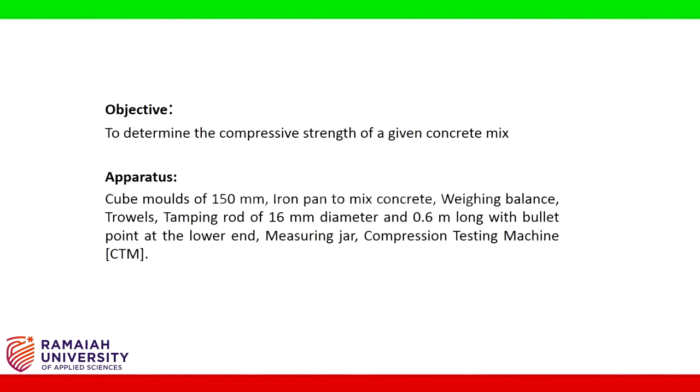Hello friends, with this experiment we are determining the compressive strength of a given concrete mix. Apparatus: cube molds of 150 mm, iron pan to mix concrete, weighing balance, trowels, tamping rod of 16 mm diameter and 0.6 meter long with bullet point at the lower end, measuring jar, compression testing machine, that is CTM.

Compression test is the most common test conducted on hardened concrete, partly because it is an easy test to perform and partly because most of the desirable characteristic properties of concrete are related to its compressive strength. One of the most important properties of concrete is its strength in compression.

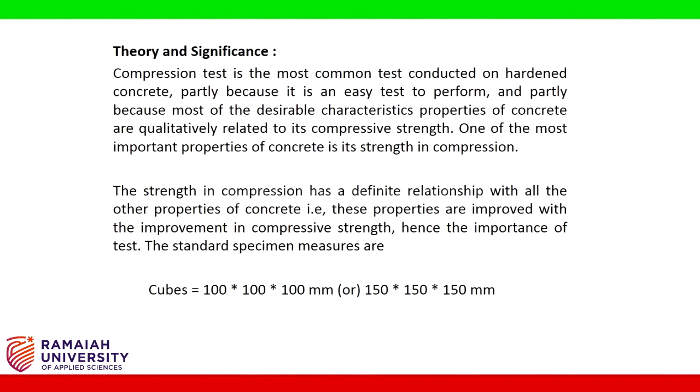The strength in compression has a definite relationship with all the other properties of concrete, that is, these properties are improved with the improvement in compressive strength. Hence the importance of the test. The standard specimens are cubes 100 x 100 x 100 mm or 150 x 150 x 150 mm.

Procedure: sampling of materials. Samples of aggregates for each batch of concrete shall be of the desired grading and shall be in an air-dried condition. The cement samples on arrival at the laboratory shall be thoroughly mixed dry either by hand or in a suitable mixer in such a manner as to ensure the greatest possible blending and uniformity in the material.

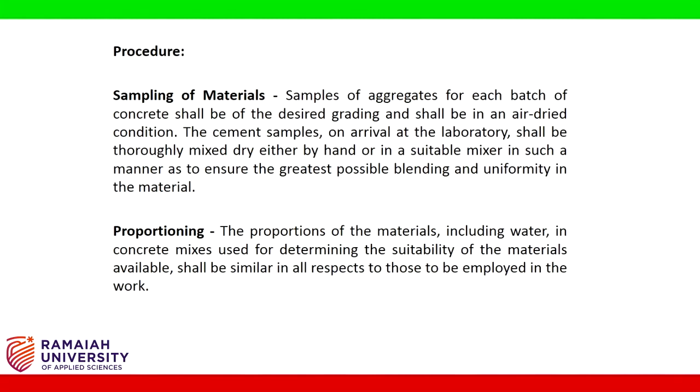Proportioning. The proportions of the material, including water, in concrete mixes used for determining the suitability of the materials available shall be similar in all respects to those to be employed in the work. Weighing. The quantities of cement, each size of aggregate, and water for each batch shall be determined by weight to an accuracy of 0.1% of the total weight of the batch.

Mixing concrete. The concrete shall be mixed by hand or preferably in a laboratory batch mixer in such a manner as to avoid loss of water or other materials. Each batch of concrete shall be of such a size as to leave about 10% excess after molding the desired number of test specimens.

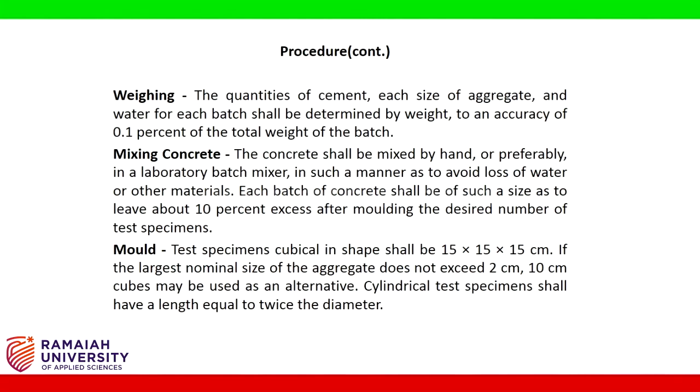Mold. Test specimens cubical in shape shall be 15 x 15 x 15 cm. If the largest nominal size of the aggregate does not exceed 2 cm, 10 cm cubes may be used as an alternative. Cylindrical test specimens shall have a length equal to twice the diameter.

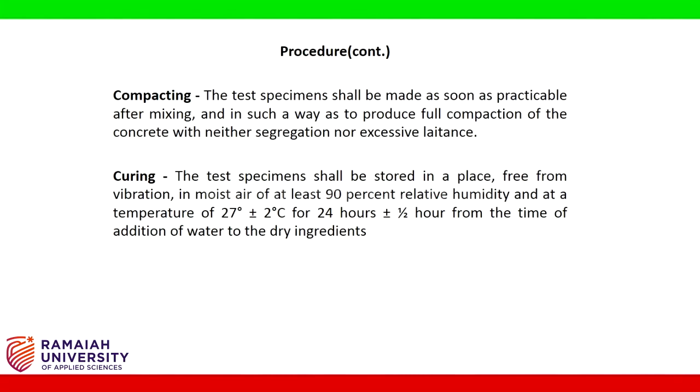Compacting. The test specimens shall be made as soon as practicable after mixing and in such a way as to produce full compaction of the concrete with neither segregation nor excessive laitance. Curing. The test specimens shall be stored in a place free from vibration in moist air of at least 90% relative humidity and at a temperature of 27 plus or minus 2 degrees Celsius for 24 hours plus or minus half an hour from the time of addition of water to the dry ingredients.

Placing the specimen in the testing machine. The bearing surfaces of the testing machine shall be wiped clean and any loose sand or other material removed from the surfaces of the specimen which are to be in contact with the compression platens. In the case of cubes, the specimen shall be placed in the machine in such a manner that the load shall be applied to opposite sides of the cubes as cast, that is, not to the top and bottom.

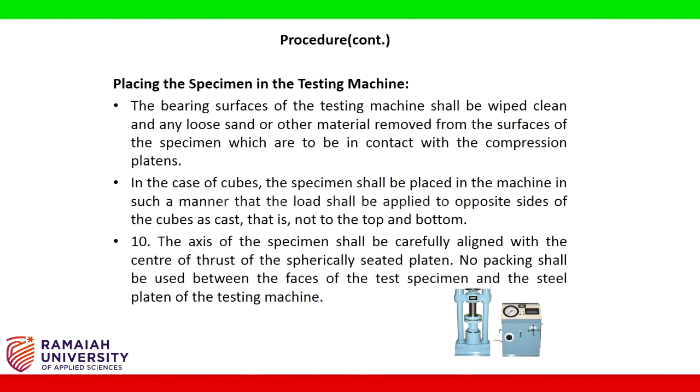The axis of the specimen shall be carefully aligned with the center of thrust of the spherically seated platen. No packing shall be used between the faces of the test specimen and the steel platen of the testing machine. The load shall be applied without shock and increased continuously at a rate of approximately 140 kg per square centimeter per minute until the resistance of the specimen to the increasing load breaks down and no greater load can be sustained.

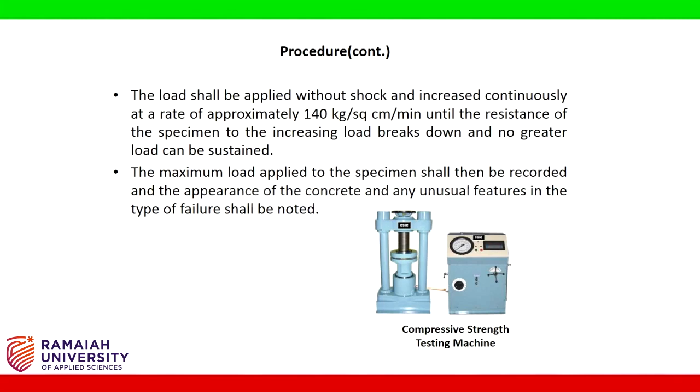The maximum load applied to the specimen shall then be recorded, and the appearance of the concrete and any unusual features in the type of failure shall be noted. Data collection and tabulation is as shown in the table.

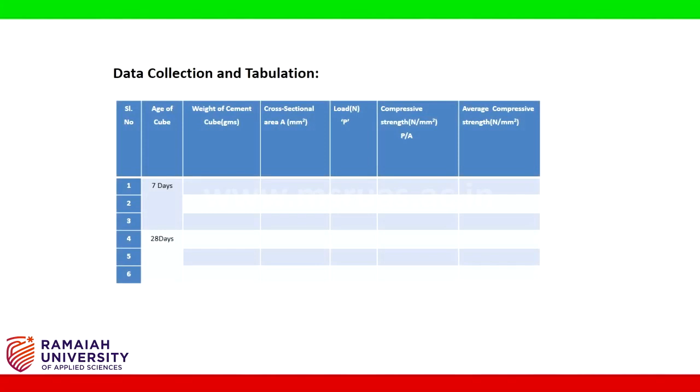Hi students, today we will start discussing the tests on hardened concrete. There are three important tests that we are going to do on hardened concrete. The first is the compressive strength of the concrete, the second one is the flexural strength of the concrete, and the third one is the split tensile strength of the concrete. So we are discussing now the compressive strength of concrete cubes. So the apparatus required for compressive strength is the CTM, that is compression testing machine.

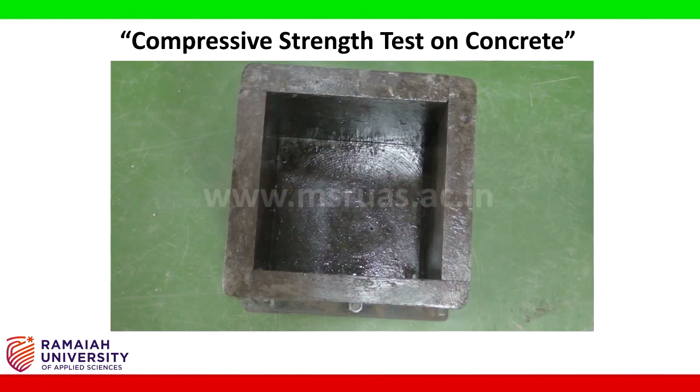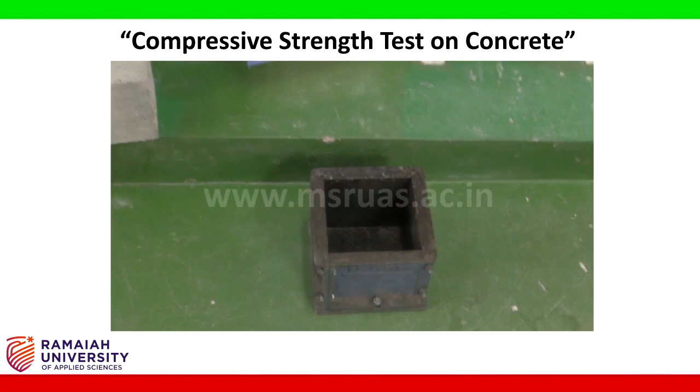This is a concrete cube mold having the dimension of 150 mm width, 150 mm length and 150 mm depth. Along with that, we require all the materials which are required for making a concrete, that is the fine aggregate, cement, coarse aggregate and the water. So let us go through how this is done.

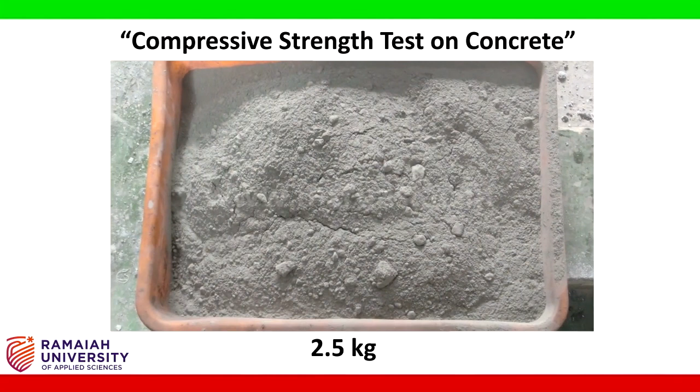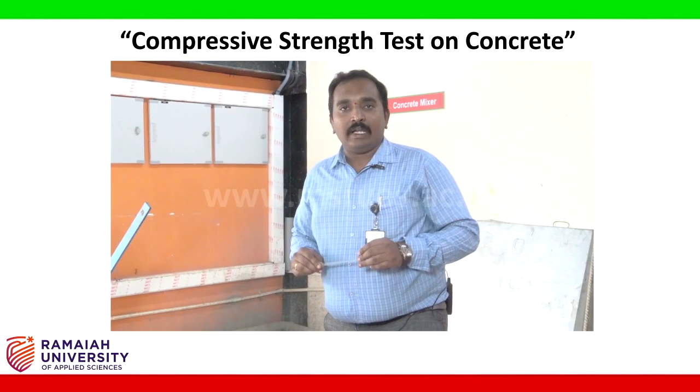The second step is preparation of mix. As of now, we've taken 2.5 kg of cement, 5 kg of fine aggregate and 7.5 kg of coarse aggregate, which comes to ratio 1:2:3. We generally do it for M20 grade concrete. For the first trial, I am considering the water cement ratio as 0.4.

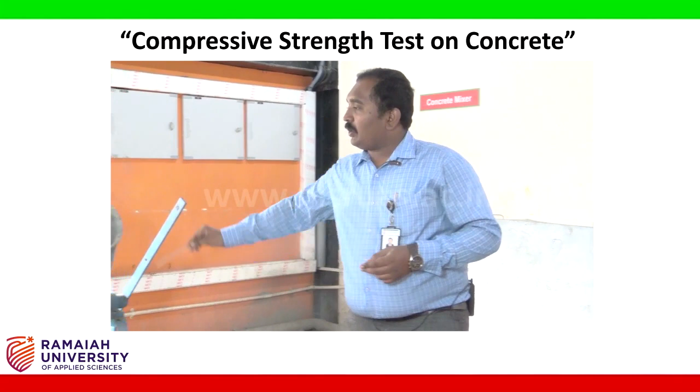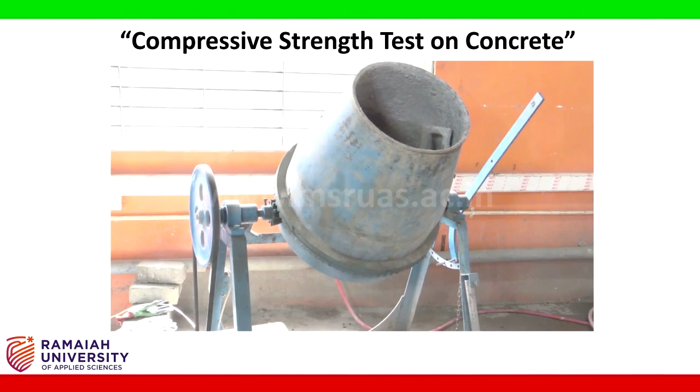We start mixing the concrete. First, we make sure that the concrete mixer, on the inner side, is smeared with the oil. So first we add the coarse aggregate to the concrete mixer. After coarse aggregate, the fine aggregate will be added.

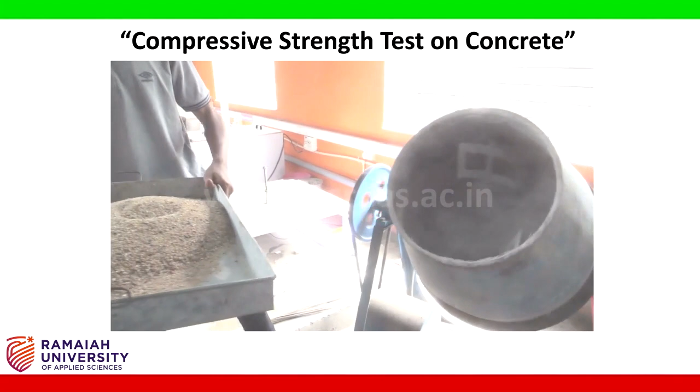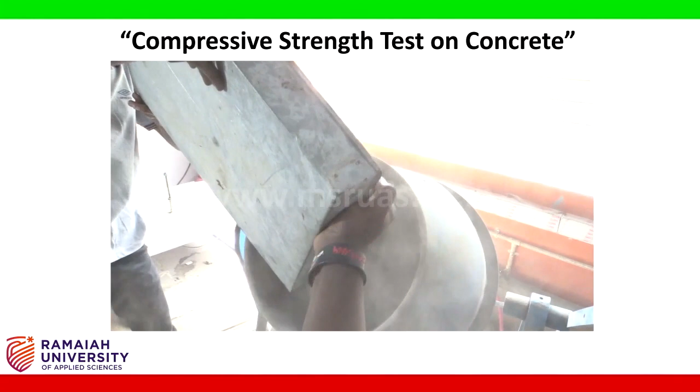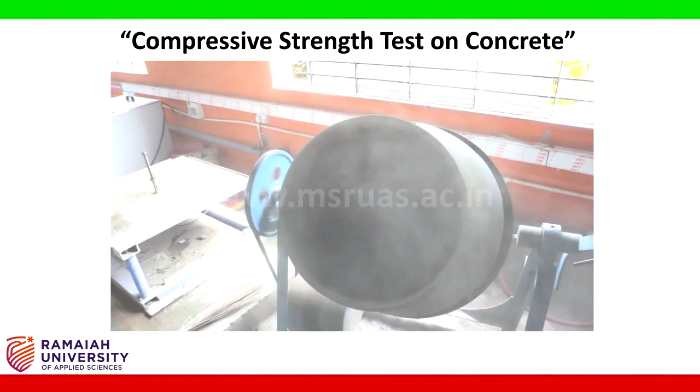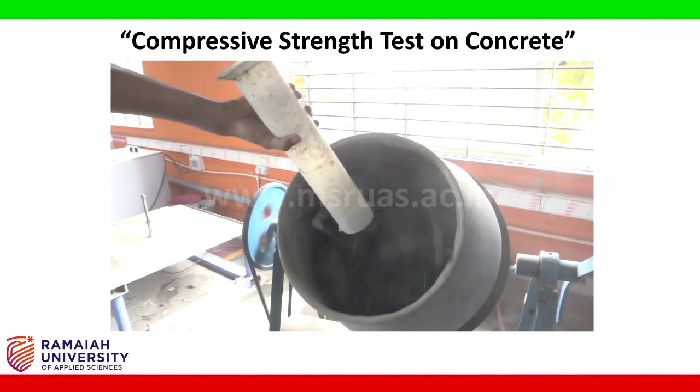After this, the cement will be added along with the water which is prescribed for this particular mix. Add the water. We are pouring the entire mix of concrete onto the tray.

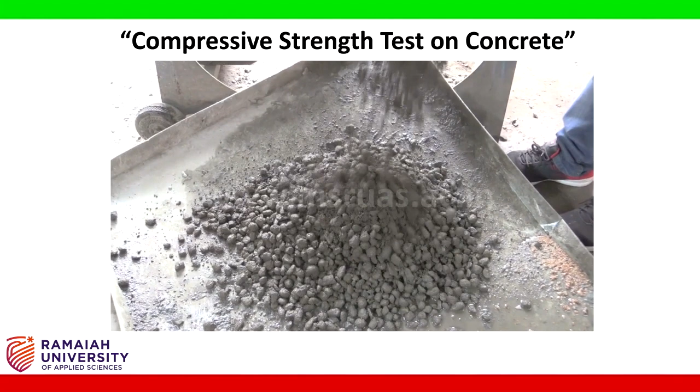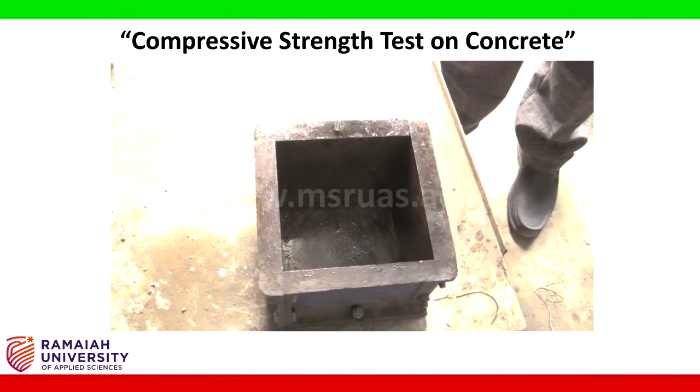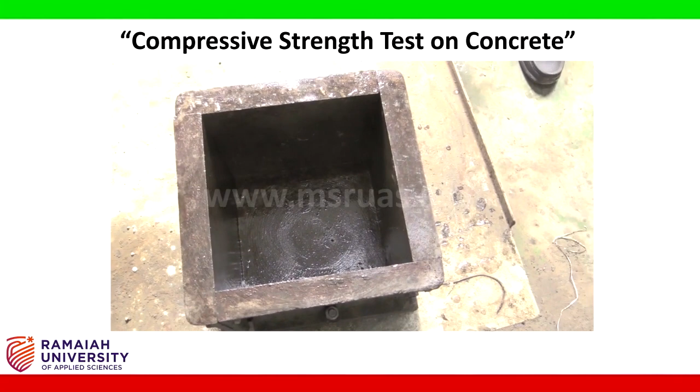After mixing the concrete, we are going to make sure that the oil is smeared inside the mold, and we are going to fill 1/3 layer of this mold with the prepared mix. After placing 1/3 mix, we should compact this 1/3 layer with 25 tampings, or what I am doing here is I am using the table vibrator for compacting the mix.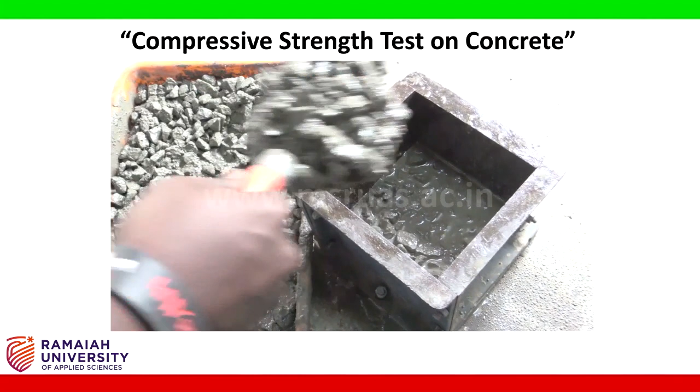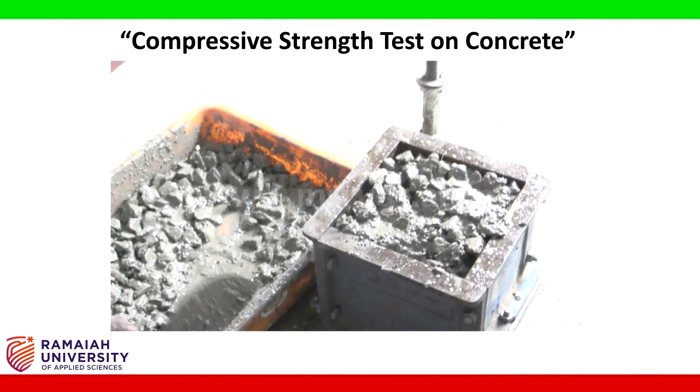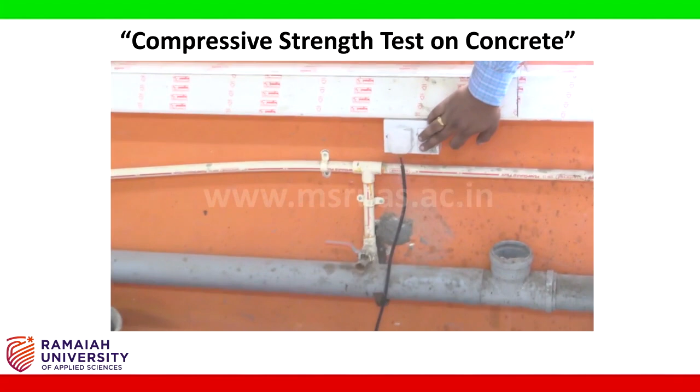The second, third layer will be added, and the final layer will be added. Like this, the cube is prepared.

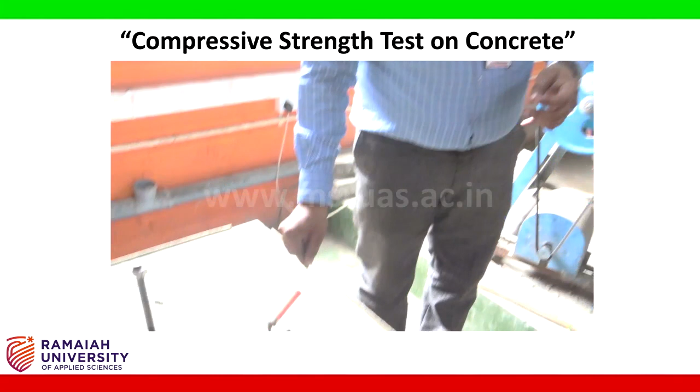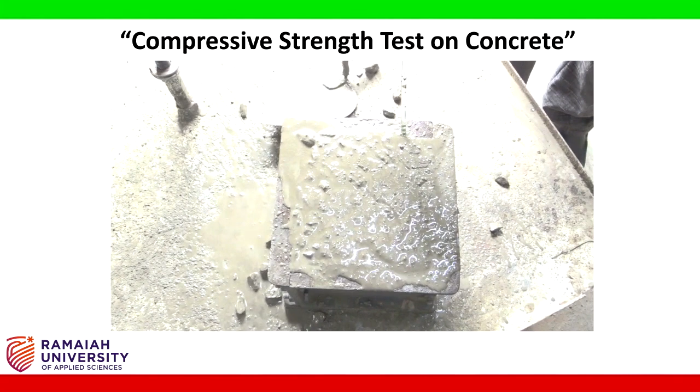So here we are doing only one sample. If I go for the IS requirements, minimum 3 samples have to be cast for one particular testing. Right now I am doing only one sample. We are going to allow this mold as it is for 24 hours. We'll air cool it. Then we are going to demold the shutter. After demolding, we are going to keep it in curing for 28 days.

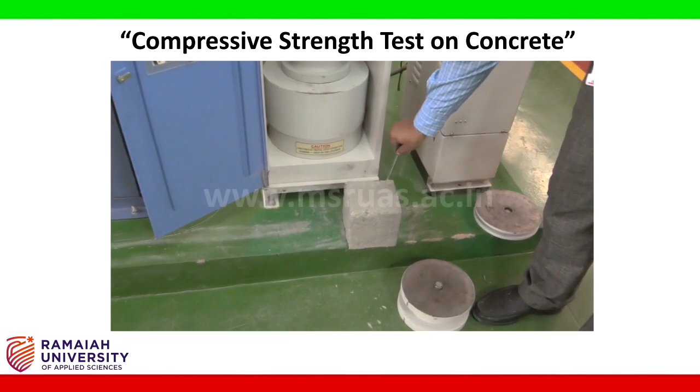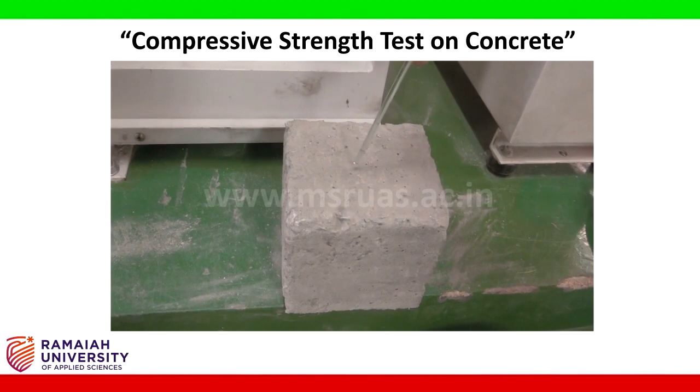After curing it for 28 days, we are going to get a cube. The dimensions of the cube are measured. So L, B gives you the cross-sectional area of the cube. Suppose this is my casting surface. I need to place and apply the load on the other side, not to the casting surface. I am going to subject this particular cube to compression.

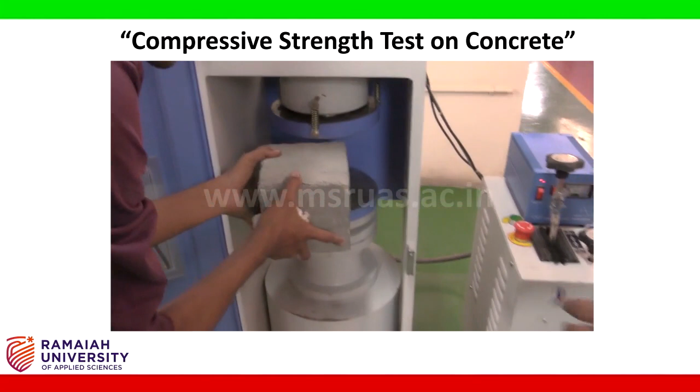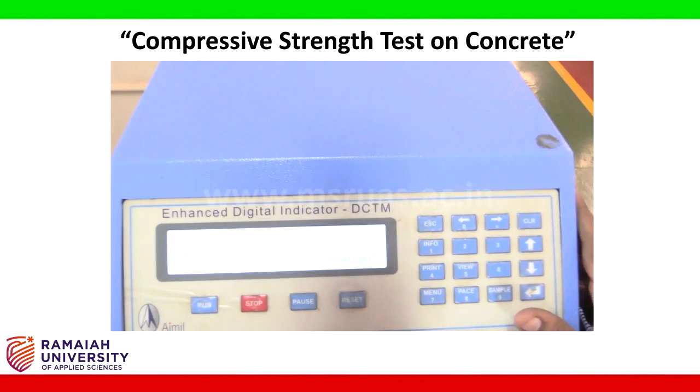After this, I am supposed to operate the compression testing machine. I am going to bring it to the compression mode. Select operating mode. It asks for mode 1 is compression, mode 2 is flexure, and mode 3 is prism setting. I am going to give compression. I put enter. It asks unit is SI. Yes, I want it in Newton per millimeter square. It tells you the model and the maximum capacity of the compression testing machine, 2000 kilonewton.

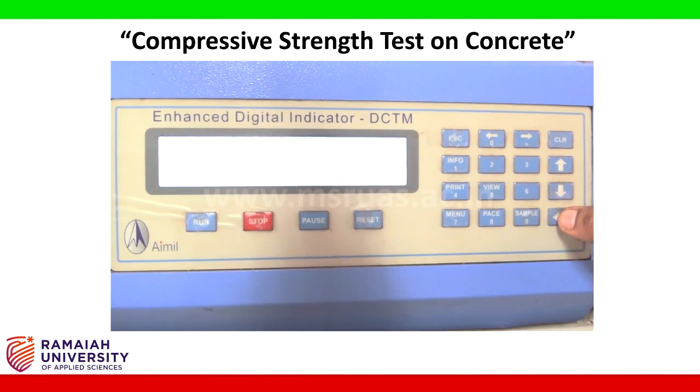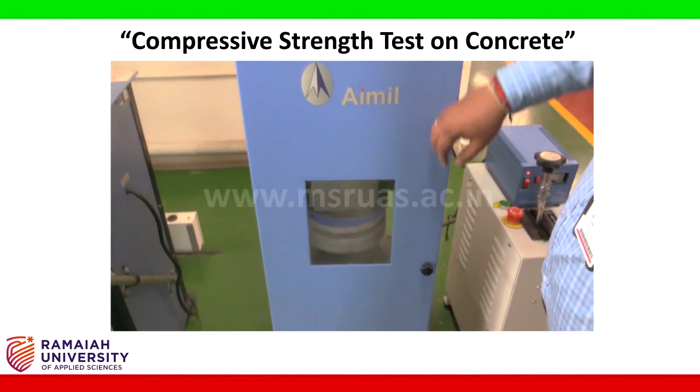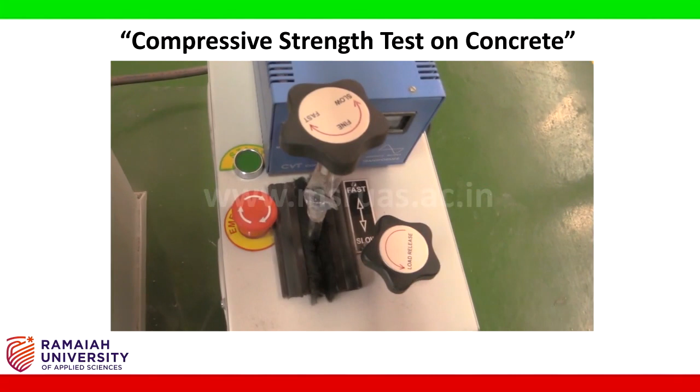After this, we are going to close the shutter, because there is a chance that under compression the cube particles may hit the tester. After doing this, we are going to tighten the load release and keep it in the center. We remove the emergency. It will be initially on. We are going to remove it. We are going to start the pump and run the testing.

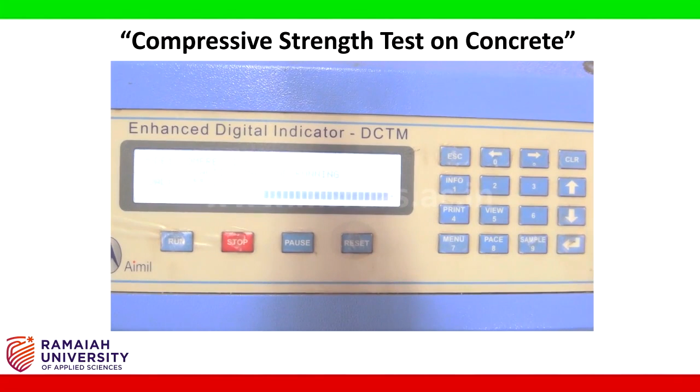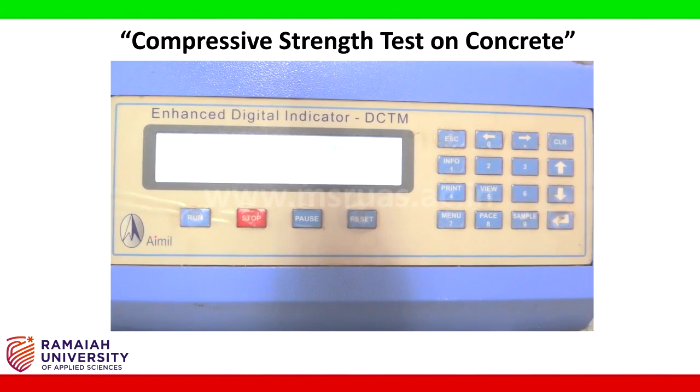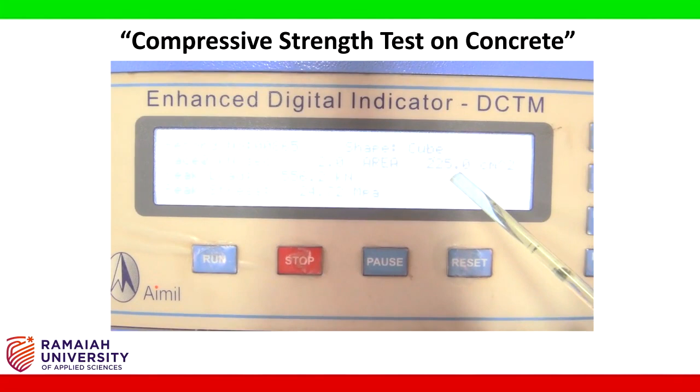We are applying the load. We are going to take up the maximum load of failure. How are we going to observe? If you observe, there is an increase in load and decrease in load. Already you observed it went to 500, so it gives an indication that the sample is broken, and it gives the peak load, that is 556.2 kilonewton. I already fed the cube dimension, that is 15 cross 15, that is 225 cm square. We have a provision that automatically gives the compressive strength, that is 24.72 MPa.

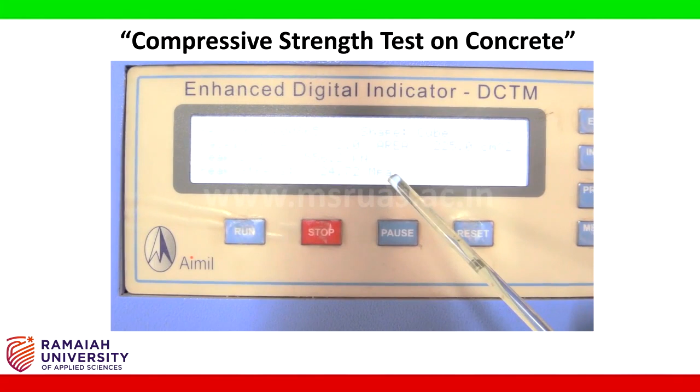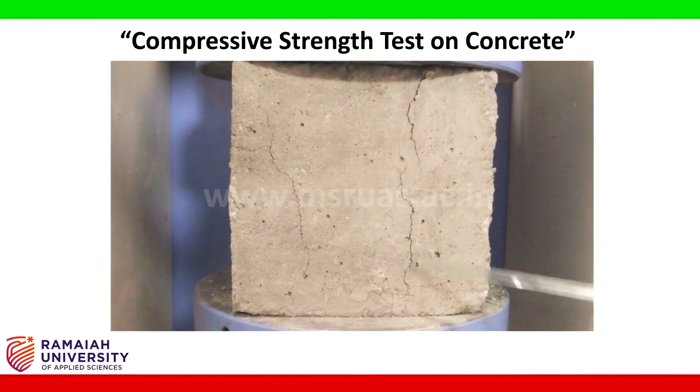So this experiment has to be repeated for 3 samples or 6 samples. The average compressive strength reading will be considered, and we call it the grade of concrete. So it is 24.72 for this particular sample. We take the average of 6 samples or 3 samples, and the average compressive strength will be noted down for that particular grade of concrete. Observe the appearance of the cracks on the concrete cubes. So this completes the compressive strength of concrete experiment.